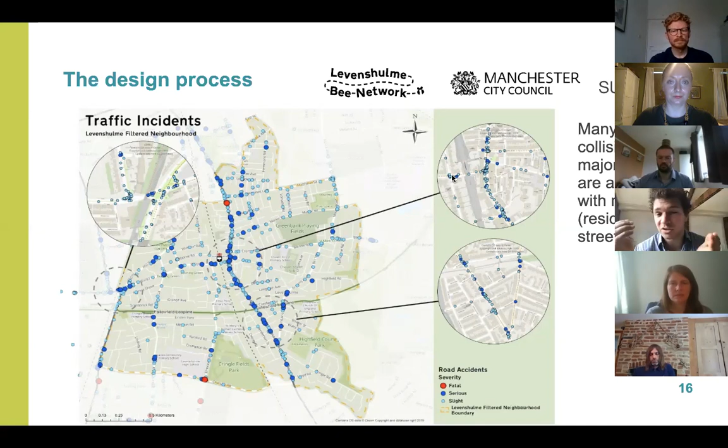So the process started with data analysis - that's the starting point for any engineering project. We looked at the collision data, a lot of the collisions that have been happening, and we see quite a few on major roads. But what's really interesting is that when you look in more detail, they don't happen anywhere on the major road - they tend to happen at junctions, where the major road intersects a minor road. Many of these collisions are because the traffic volumes on the quieter streets are very high. So when someone's trying to cross the road they'll get hit, or if cars are turning in and off the major road, those tend to lead to a lot of collisions. So it's not just because of traffic volume on the major road, but also because there are lots of cars on the quieter residential streets.

We also looked at traffic data - this is telemetric data for all of 2019. We were planning on doing physical traffic counts, but COVID happened, so it would have shown very little traffic. The graph shows the size of the pie chart - the bigger the pie, the more traffic. The red amount is through traffic, and the blue amount is local traffic. So you can see that across the whole area, a lot of the traffic is through traffic - the local traffic makes up a very small amount.

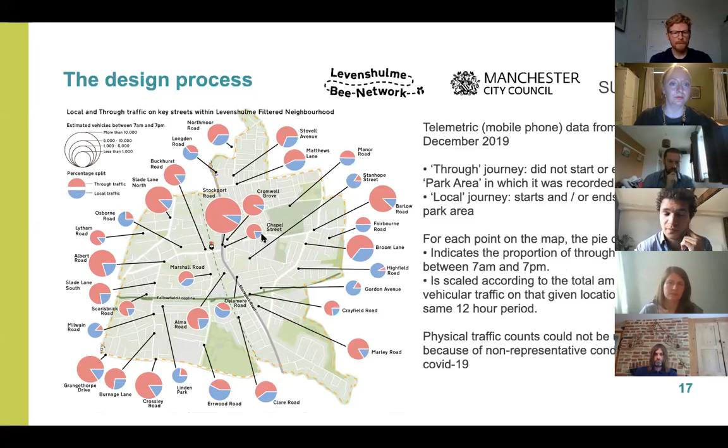So we started co-creating the proposals, and I know some of you were attending some of the co-design workshops, others didn't attend. We would have loved to have a 30,000 people event. That would have been quite challenging to manage, but there were a lot of people that attended. We had one in Burnage as well.

The blue routes, there was a lot more discussion and debate. Understandably, different people have different perceptions of whether roads should be connectors or not. And this is the takeaway that we came away with. These are the summary of the community engagement event.

And then there's obviously engineering expertise to work on this and develop, to determine which of these blue routes should still be open to through traffic, and which ones should not. There was a lot of debate, particularly for the streets in this area, so Errwood Road, Burnage Lane, and Slade Lane. Some people thought they're important links that cars should be using, but other people suggested, well, there's a lot of schools, and actually, should the traffic not really be on the parallel A roads?

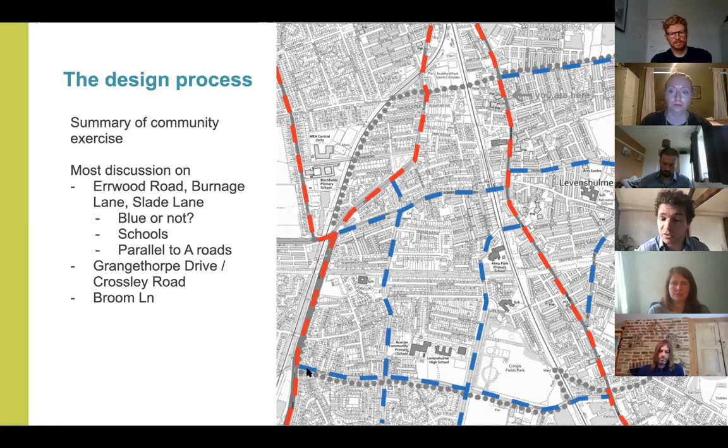They're very close. Are people just using it to avoid the traffic lights on the major roads? And similarly, a lot of discussion around Grangethorpe Drive and Crossley. Crossley is a bit larger. Grangethorpe feels a bit more residential. So some very interesting conversations there that we took away to make the final decision.

For the trial, to make the decision on the filtered neighborhood boundaries, this is the map that we came up with. You'll see that Errwood, Slade, and Burnage were determined to be local routes, for access only, so they should not be used for through traffic. The main reason for this is because they are parallel to A roads in very close proximity.

It was really felt that the traffic should be using those roads instead of going past all the schools, particularly on those two streets. In terms of Grangethorpe Drive, I'll touch on this further later, but I think in nature, yes, ideally it would maybe be an access-only route, but there's no obvious A road parallel to it where traffic should be taking. So there's more of an issue.

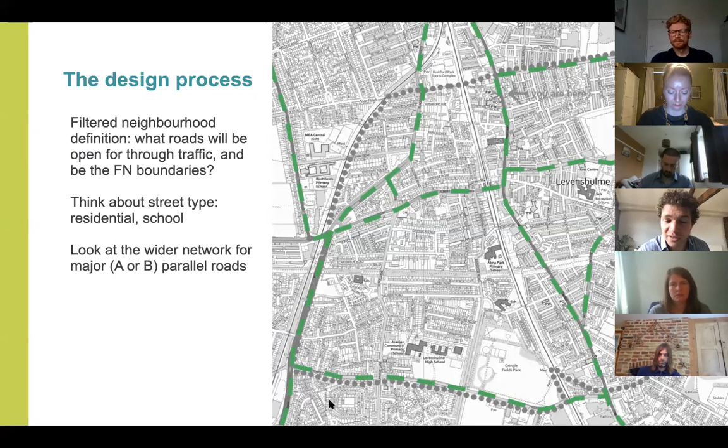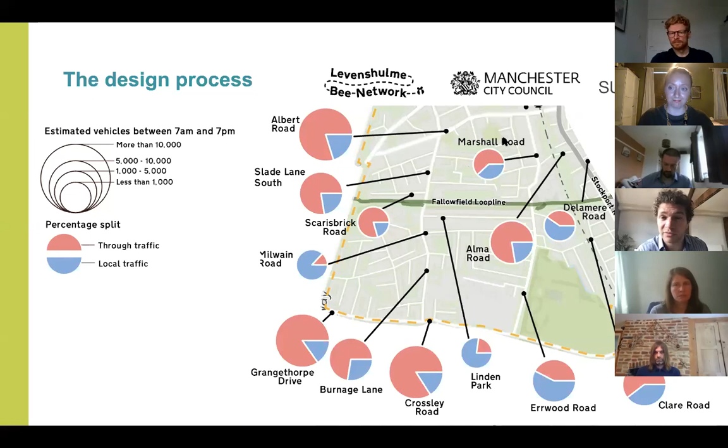If you look at Slade Lane, the traffic should obviously go onto Kingsway. If you look at Grangethorpe Drive, there's no obvious place for that traffic to go to on a parallel route. This is in more detail, the traffic data that we collected, and you can see just the amount of through traffic using particularly Burnage Lane, and through traffic using Alma Road, Clare Road. So through traffic can be removed from these residential streets and can evaporate, which I'll touch on later. Even Marshall has very high volumes of through traffic.

I'm just going to try to talk you through the design approach on informing where the filters go. I know this is a bone of contention, and I'll put our hands up. We haven't provided this level of detail in the information, so it's understandable that people don't quite understand the rationale of why are we putting bus gates, why are we putting them where we're putting them.

So the two design principles of a filtered neighborhood are that every property can still be accessed by car. This is essential. We understand people have reduced mobility, or have to do longer car journeys, and the scheme would never remove that access. But the second principle is that cars can't travel straight through the neighborhood. So if you want to travel straight through the neighborhood, you've got to do it on one of the outside roads, not through it. So we started by looking at the north-south routes through the neighborhood, which are the ones highlighted in blue here.

And then we thought, where should we put a modal filter to make sure that these movements can't happen anymore by car? We could maybe put one at the south here, but that would displace the issue onto the two parallel routes. So we want to put as few filters as possible along these two sections. You'll see that the two obvious places are over the Fallowfield Loop, because that's where only two filters are required. So that's where we've proposed them.

Obviously, buses need to still travel north-south through the area, so we couldn't have a physical bollard in the way. We had to propose a bus gate, which is effectively a bollard, but there's a gap in the middle that a bus can go through. You'll see another couple of complementary filters just to make sure that some of the other rat runs don't open up. This one here is particularly worth discussing.

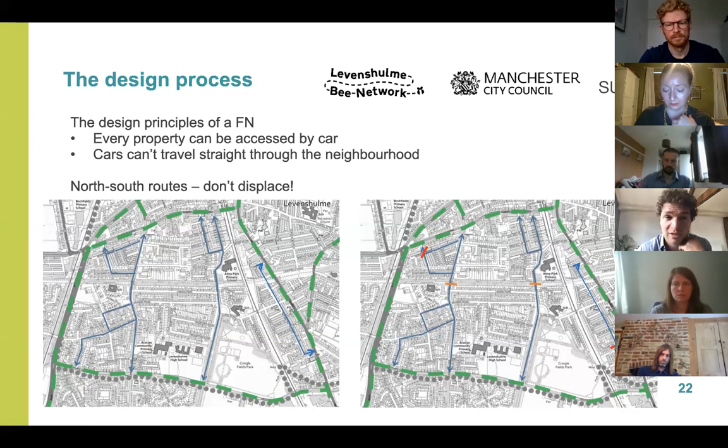These are temporary, so they can be removed. And it just very clearly says buses only. There's a camera that makes sure that only buses go through. There can be exemptions for blue badge holders in particular. This will obviously be subject to discussion with the local residents, but that is something that's possible to arrange.

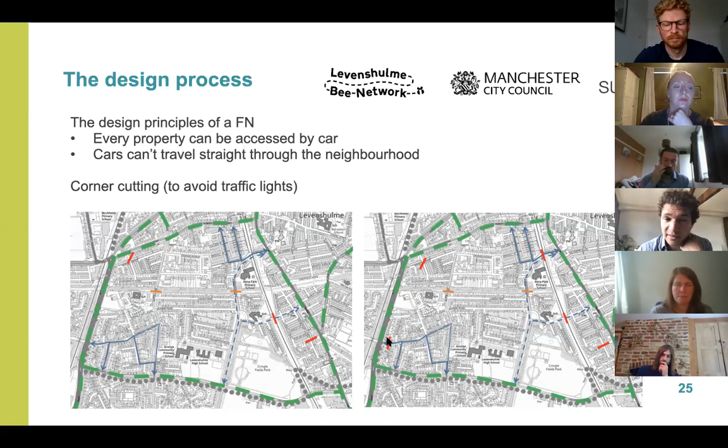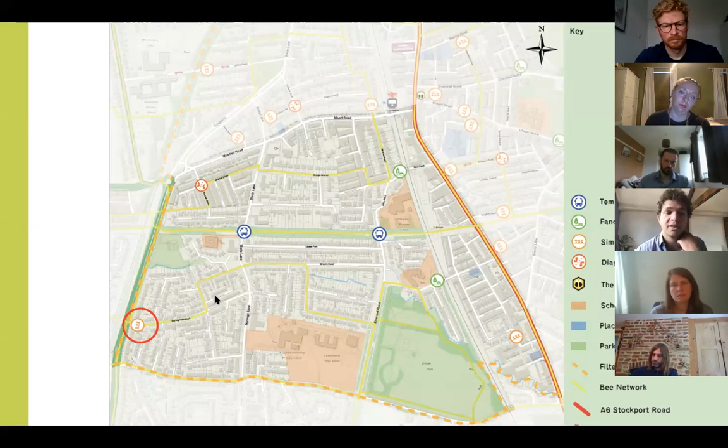I think this is quite a useful map in terms of showing what in practice this will mean for people who need to drive. It shows that for each painted area, the access routes and how far you can drive. So if you want to access off Crossley Road or Grangethorpe Drive, you can drive up to the bus gate, but you can go no further. So all the through traffic that's currently getting into Linden, into Milwain, onto Burnage, really can't get through.

There is no reason they would want to enter the area because there is no way they'll be able to get through. There will be lots of signage, signs saying no through route to here, no through route to there. And obviously Google and Waze will be notified so that they know it's not a through route, and it won't direct those Uber drivers and delivery drivers down the roads. So we really think, based on evidence from previous schemes, that the whole area effectively becomes a bit of a cul-de-sac for driving, with much, much quieter streets and much, much slower speeds, delivering the kind of benefits that the scheme aims to deliver.

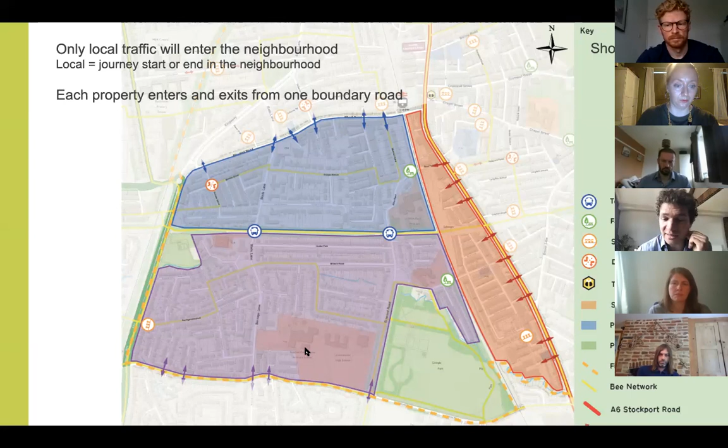In terms of the impact, I've highlighted in green the streets where we expect substantial reductions in traffic volumes. These are all within the area - Slade Lane, Scarisbrick, Milwain, Burnage, Linden Park, Alma Road - all will benefit from substantial reductions in through traffic, which will obviously improve road safety and air quality. Crossing the road will be a lot easier.

Walking and cycling will be so much more pleasant, which we've seen during lockdown - how much more enjoyable it is to walk down a quieter road.

So it's effectively delivering vast well-being improvements on those residential streets. You'll see: less speeding, less traffic - up to 90% reductions - easier to cross, improved air quality. In terms of walking and cycling, we've seen comments asking why aren't we improving walking and cycling with cycle lanes - this is effectively making it really safe. A lot of new people have ventured back out on their bicycles during lockdown because the streets have been really quiet. This is what the scheme will achieve in the area.

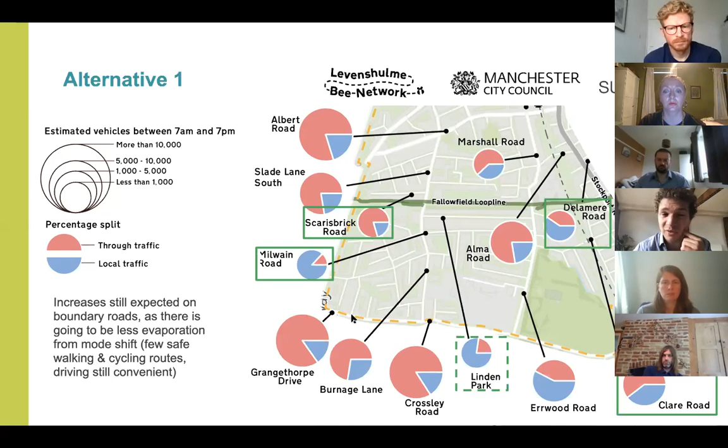I would also say the boundary roads, even in this scenario on the Grangethorpe side, there's still going to be a bit of an increase in traffic, particularly the east-to-west routes. People will still be coming down and using Grangethorpe Drive - it's not like they'll use another road. So I still think even with this scenario, Grangethorpe would likely see a short-term increase in traffic.

The second alternative I wanted to touch on is the idea of filtering Grangethorpe Drive, which is one that we thought about. As I said before, there's no real alternative obvious east to west route. So if we just filtered Grangethorpe Drive, the traffic would go down Burnage Lane South and Mauldeth Road, which I'm told has some schools and lots of traffic issues already, so it wouldn't be an obvious route, and even further down to Green End Road.

The obvious parallel closest east to west route is down here on Didsbury Road, which is about 3 kilometers away, which is a very long way away. So you can see, while with Errwood and Burnage it was easy to pick the A roads next to them, with Grangethorpe Drive it's really hard.

This basically means that this whole area would have to be filtered, which is much bigger than the project scope. It's also much bigger than any filtered neighborhood delivered anywhere. As you've seen before, one of the fundamental principles is that as a resident, you can only access one of the boundary roads. So there will be someone here whose only way in and out of the cell will be all the way down to the bottom, about a 3 kilometer detour, which is a very long way.

Just touching on cell sizes, because I've seen some comments on this as well. The balance is that an area that is too small, like for example if we were to do this, these are very small areas. The benefits are only felt on very few roads. You also don't create many routes to walk and cycle, because you'll walk a short distance but then hit a busy road. That means there's less traffic evaporation, and it's more likely we'll just get traffic displacement.

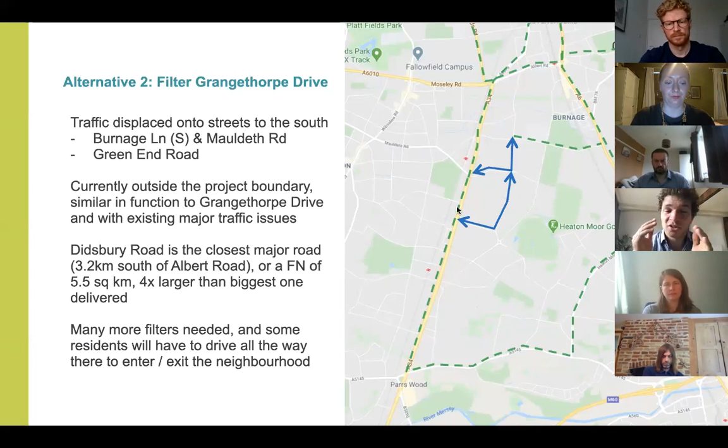We talk about switchable journeys as the ones in the region of 1 kilometer, so those are the ones easier to switch to walking and cycling. The 10 kilometer journeys, it's less likely someone will cycle them. So we usually look at a 1 kilometer journey, and a 1 square kilometer cell size, which is exactly what the current area is, about 1 square kilometer.

Just comparing it to other areas that have been delivered, some smaller areas have been delivered in Hackney and Waltham Forest, but increasingly we're seeing proposals more towards the square kilometer, maybe a little above that, but nothing in the 5.5 square kilometer region, which we'd get with Grangethorpe Drive being filtered.

I'd say the point at the bottom is definitely a valid one, that this is phase 1 of the project, and once behaviors change and people start walking and cycling a lot more, and that traffic evaporates, it becomes easier to build on and maybe extend the scheme further south into Burnage, which can also deserve some of the benefits, and we can look at filtering some of the roads down there too, to make sure that area doesn't suffer from through traffic.

Okay, I'll pick this one up.

Just a little bit on the school streets project. We've been working with schools in Levenshulme and Burnage, and there are 6 primary schools involved with the project, and we have engaged with Levenshulme High as well. The 6 primary schools did a big street survey around their school and school journeys, looking at their experience on the way to school and how that could be improved.

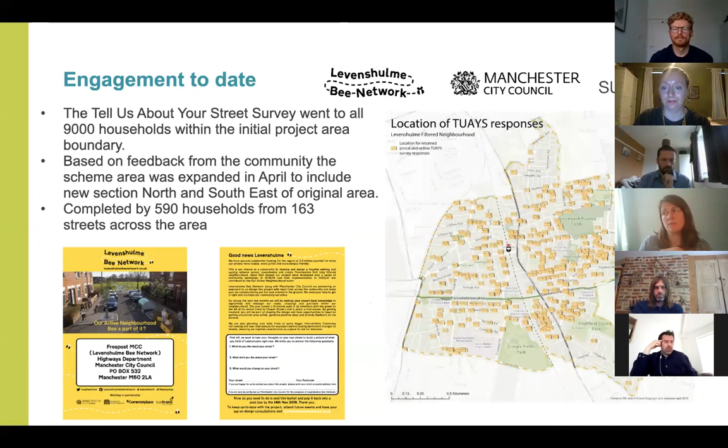Hi Ben, I'll respond to that. As I mentioned on the slide earlier, there was the postal survey that went out to all the houses in the scheme area, including the part of Burnage that's within the area. And we have worked with the schools within the area, and we've done assemblies in the schools, and there are things that have gone out home to schools, including homework and parent mail about the project, encouraging people to go on Commonplace and link in with Commonplace.

I know not everyone's on social media, but a lot of information's been put out via social media channels, and communication that's gone to councillors, and then councillors have passed that on to other people. And there have been meetings attended, such as the community forum in Burnage, and we did hold one of the events in Burnage directly, the co-design workshops in the church.

So we have endeavoured to communicate as much as possible with people about the programme and about ways that they can get involved and have their say.

There's another question here from Bodrell, which states that 80% of the responses to the survey are from the Levenshulme ward area. I'm just wondering if you have any figures as to how many responses there were from the Burnage part of the scheme and how many from the Levenshulme part, to the survey or to Commonplace or any of the other events.

I mean, you can see the spread from the two slides we've got there in terms of - I don't have the exact figures right now, but in terms of the spread from the postal survey and from the Commonplace survey, in terms of how they're distributed. We can map that in terms of Commonplace, in terms of where they've come from, the comments there, but you can see that there is a distribution across the whole of the scheme area.

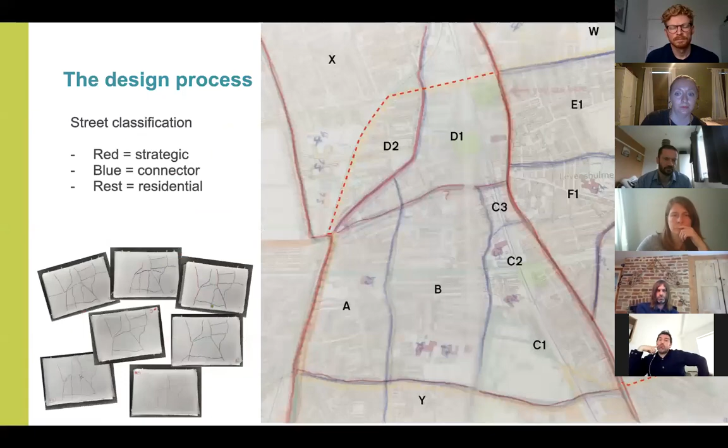Yeah, so I showed before the impact on commute trips in terms of additional distance travelled. I would say that the evidence in terms of traffic evaporation from other schemes is you can get 10 to 15% of traffic evaporation of all journeys through an area, which is a substantial amount. And that's the bulk - those are the 30% of trips that are under 1 kilometre. So some people will decide to take the bus or cycle their longer journeys, but in reality, most of the mode shift and most of the evaporation will be from those shorter trips.

Okay, just while we're on that, Guido, there's an anonymous viewer who's asked, please provide references to statistical analysis for the 30% figure. Are we able to get those kind of details of where that analysis has come from in the future to people? Yeah, so the Waltham Forest case study is the one that's been in for the longest, so they've been able to observe the effects of those.

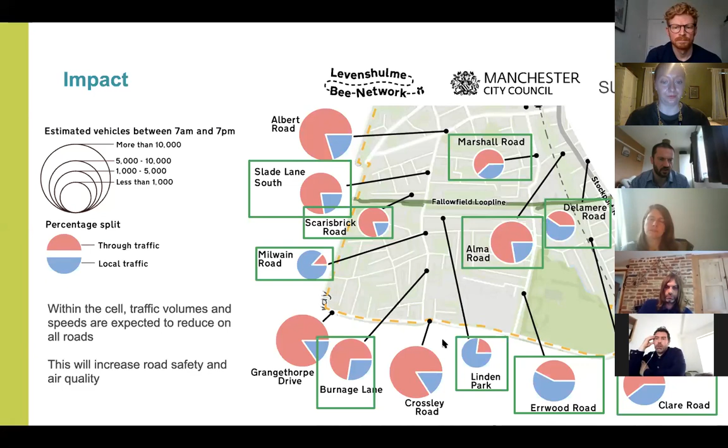Okay, thanks for that. Some questions being asked about when will questions be answered, and I know it's the intention that where collective groups of questions have been answered, to send them out as soon as possible. Obviously it wasn't possible before the webinars this weekend, so we should take that as noted that we will be sending those answers out to groups of people that have submitted questions. Peter Bainbridge has got a very good question here as well.